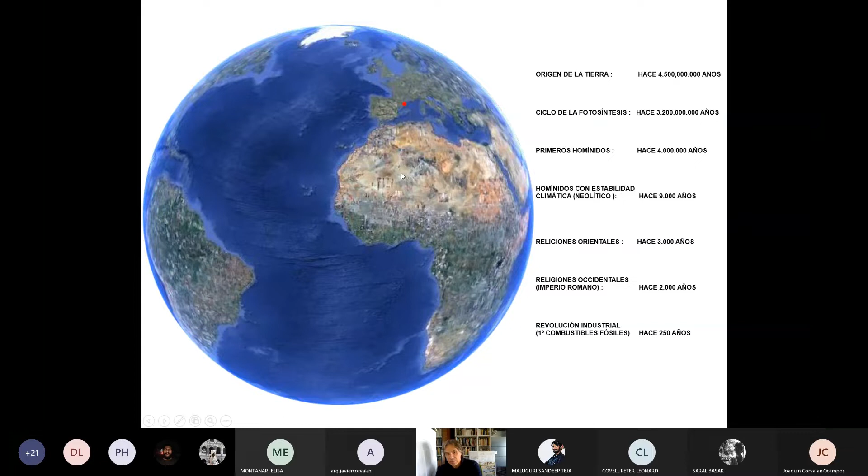Then on this side there is another scale. We zoom in, and you have the coast of the Iberian Peninsula, and in this part here you have the Cap de Creus, which is where I did my doctoral thesis. All this peninsula is 10,000 hectares.

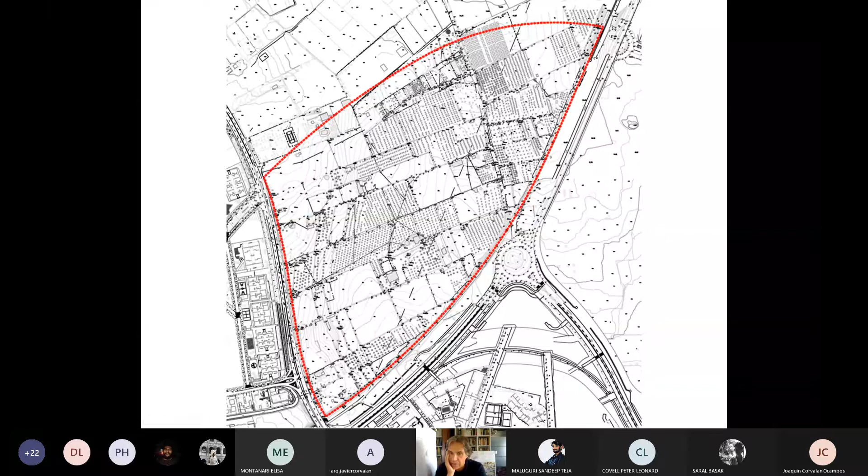The laws of the city are different laws from the laws of the territory. These laws are logical because they understand the water system, understand the resources, understand the necessities, but these grids understand economic interest, understand automatic urbanization with the streets, etc. It's a strong element to live in, I think.

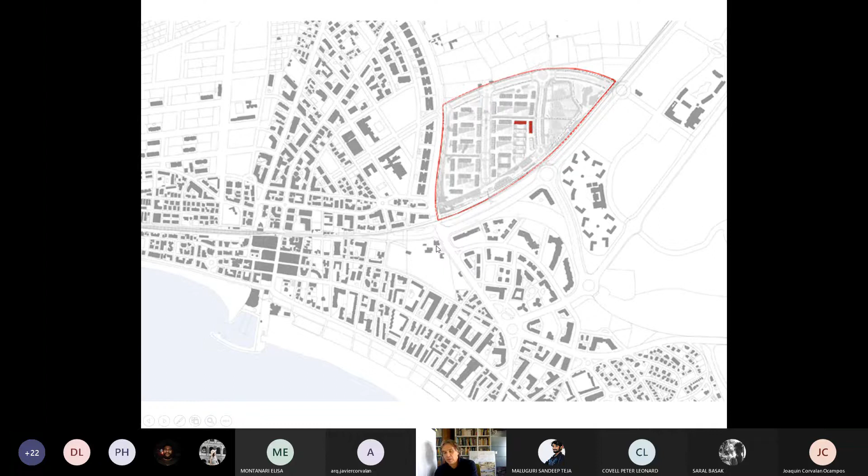But the competition is about this corner, in this system. We like to understand that normally people build this kind of big buildings for summer holidays, etc., with glass verandas, etc. And they make mistakes like this, with this inclination of this element.

Then the sun is all day burning people's legs, and they need this because of that. But if you put it in a vertical position, it doesn't happen. And then I ask, where does this inclined element come from, or maybe this designed bench in the same situation?

But you can never sit here in summer because people put this tree in the north part, which for us is where there's no sun. And then in this combination of tree and bench, you don't have shadow in summer.

It's another big mistake, no? But we prefer to understand the site not in these codes. We prefer to understand this element in another kind of code. We like to understand the habitability from these closed cycles about the water and the resources. And then we see the mountains, the lands, the different elements that appear as elements that interact with the environment.

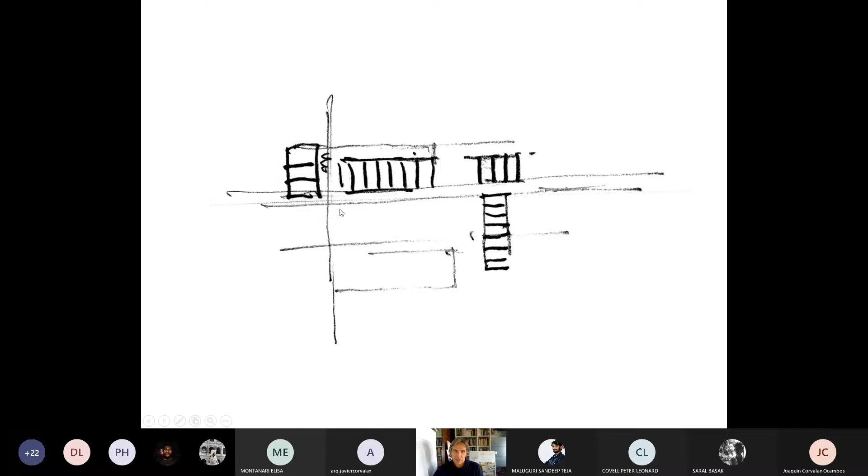And then the two red blocks, we work like this, opening this part, turning the corners and opening this part. In the competition they want the left model, we propose the right model, with these white parts in every plant of the building, that is ground floor plan plus 3 plants.

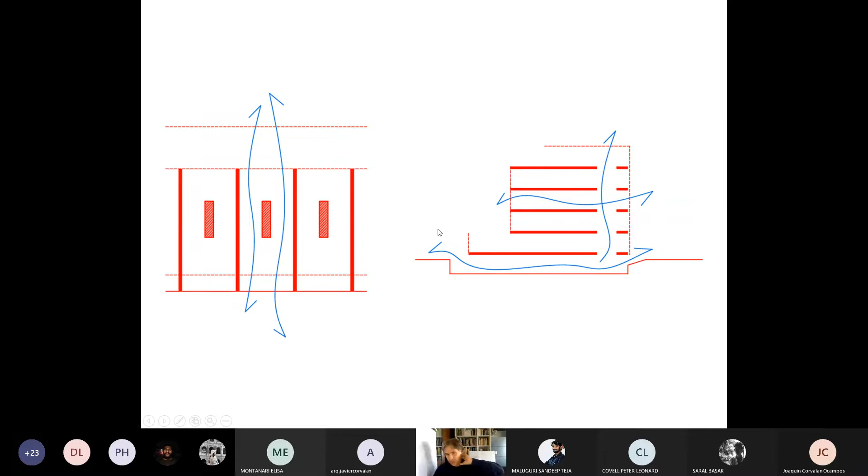Then we propose this technical element in the middle of every apartment, this patio, and this cross ventilation in the parking lot and in the apartments. Then these 10 meters, we propose a little forest of caducifolia leaf trees like this, because the north wind is the principal wind.

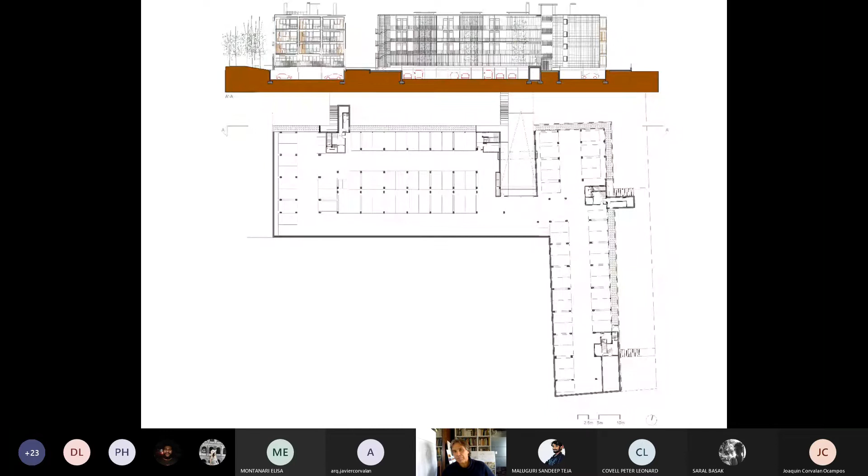And then, as you see in another section, this is the different plants. Here is the facade that you have when you arrive. This is in 2009, when we finished the building, and the trees are younger.

And this is the section. The principal wind from the north refreshes with the trees, a second time refreshed with this curtain of caducifolia leaves, this vegetal facade. And then this pre-refrigerated air goes from this patio that is like a chimney and moves more quickly. After, when you open the doors or windows, this fresh air enters and crosses the apartments.

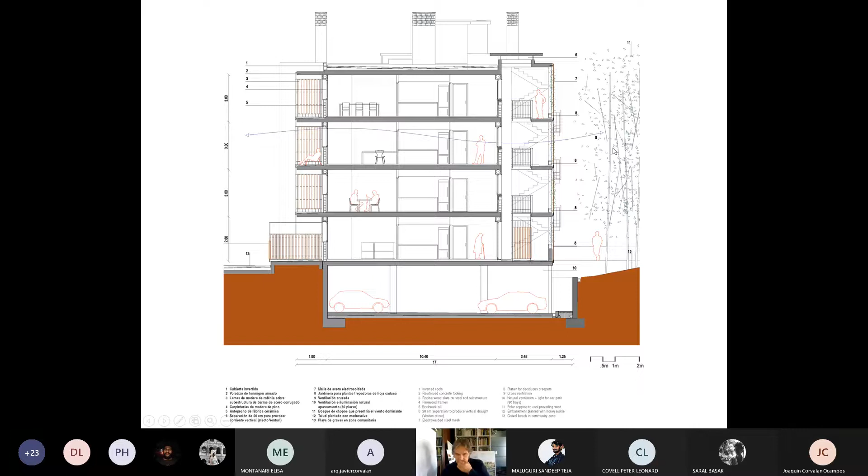On the left is the south part, where you have another kind of shadow. This is the parking lot.

And in the last plan you have the patio with the roof and this little frame, because the air does this natural chimney effect, and when you open the window or the doors, this fresh air enters and crosses all the apartment. This is the little square in front of every 2 apartments.

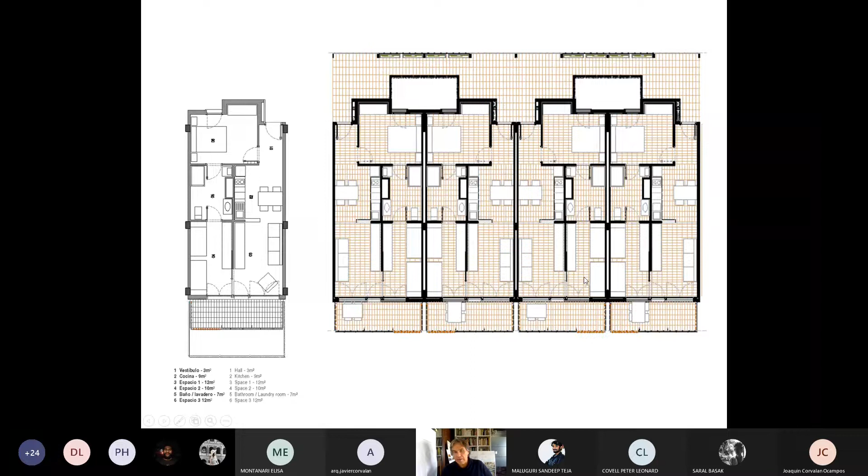This is the plaza in front of every 2 apartments, the patio, that's the privatization with the room, and it's an easy element that 80 groups of people can interpret freely.

This is the south part where you have the 2 elements, shadow or sun. This is the part that we open in the principal steps.

This is when we finish the work, and then the crisis of 2008, 2009 arrives, and they stop building.

And this is one unique hall where we divide into door, window with an element for a table at 90 centimeters, and window with a little bench of 45 centimeters. This cross ventilation, space for the table, and the corridor door in the middle between these 2 polyvalent elements: living room, dining room, second room, the bathroom in the middle, and the kitchen too.

You can turn around all the apartment, and people interpret from their necessities this unique condition of habitability, conditions of habitability.

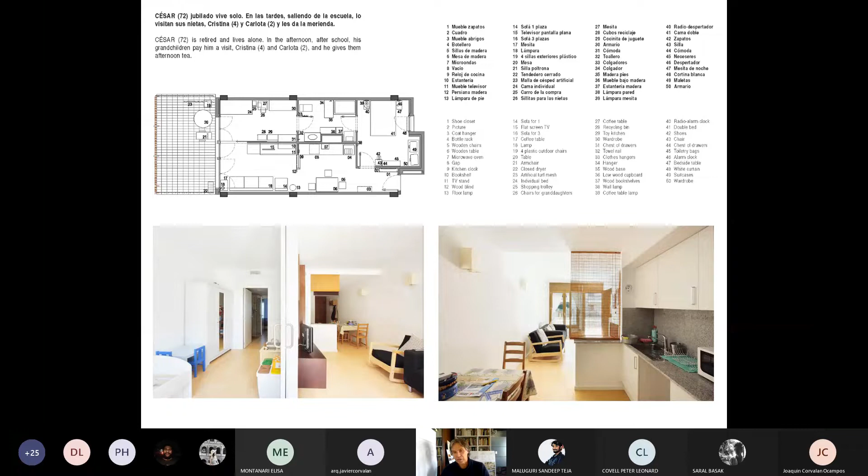We register the people in the first years, what furniture they put, what is the profile of the people that live here, and how they freely interpret these conditions that we offer to inhabit.

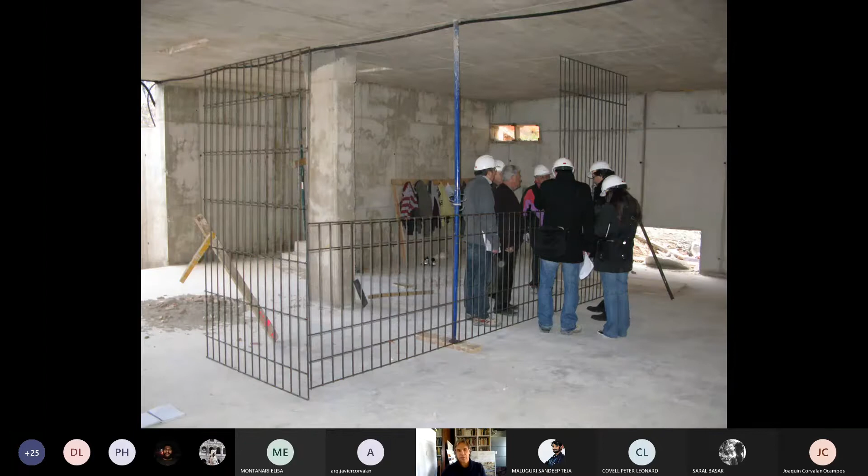The shadow and sun with this element that we prefabricate in the atelier, and then we do a prototype in the parking of the building when it's in the process of construction, and then we insert this grid of elements, and after we put the wood to build the shadow.

And after this pentagram, people interpret it as their necessities. You see the parabolic antenna, the bicycle, and after you see the transformation of the site. Or maybe the dog and the little house in the shadow. This March month, I think, is the same time as now, taking the sun in the morning, etc.

More private people using the last rear bar to add this privatization element. Time passes with different elements, and visits from different universities bring different neighbors who like to show their houses, how they live, and they send WhatsApp messages after. This is one year versus twelve years after people arrive for the first time. You can see these new elements added to the same rear bar for protecting or privatizing the terrace.

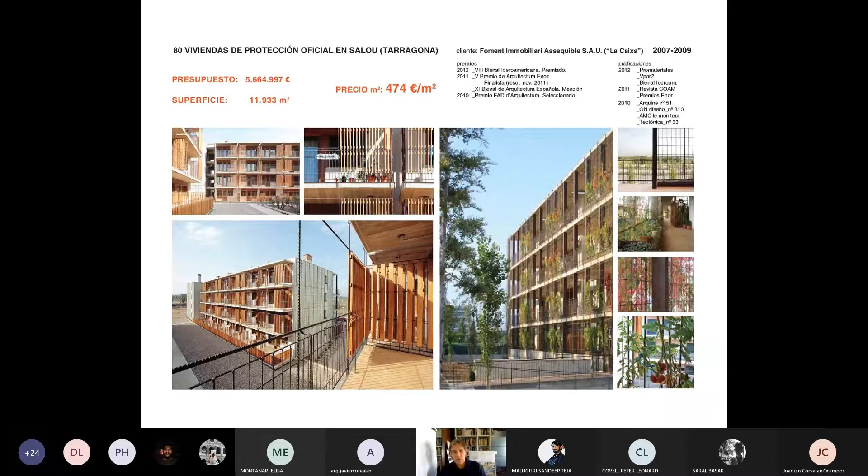This is low budget because it's a logical interpretation, and the materials are not expensive materials, and we try to optimize the resources. Then from this grid we go to another grid, from the Tarragona lands to Barcelona lands.

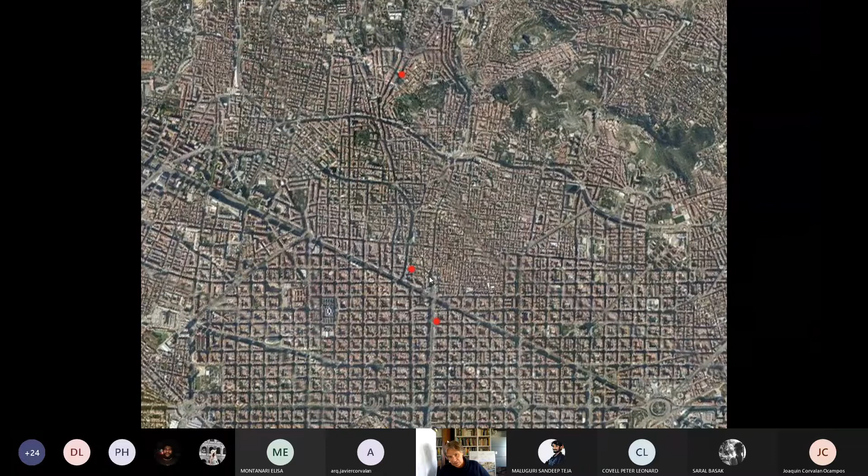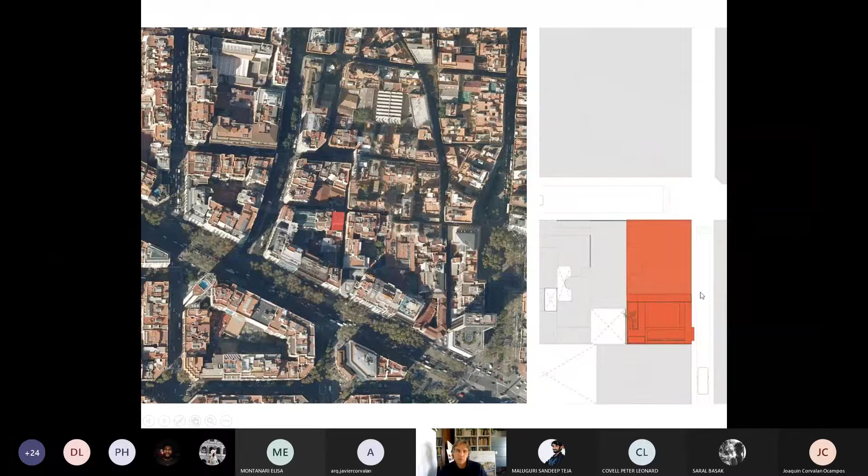This is the point - this is the big grid of Cerdà, this is the micro scale of Gracia, and in this corner, we need to interpret a pre-existing building where they have the ground floor plan as parking, garden, terrace, and after in the corner you have this specific element where the facade does this movement.

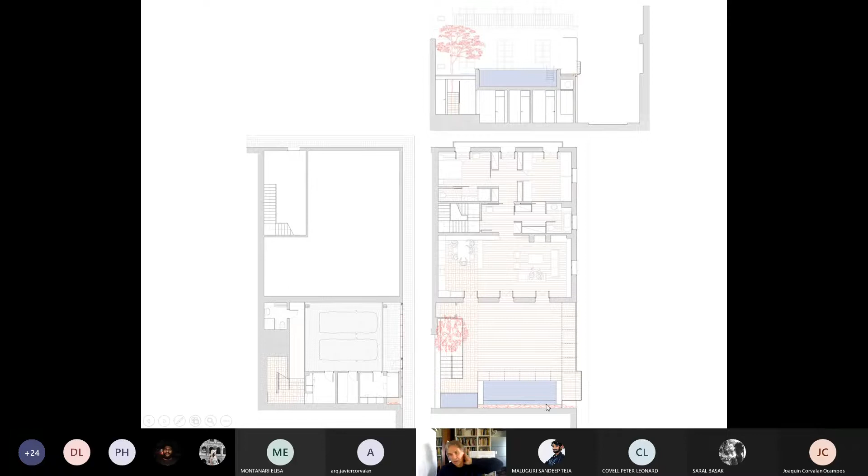We do the rehabilitation of the interior building, and then we propose this entry from this garage, garden, and swimming pool in this party wall. This is the infrastructure of iron.

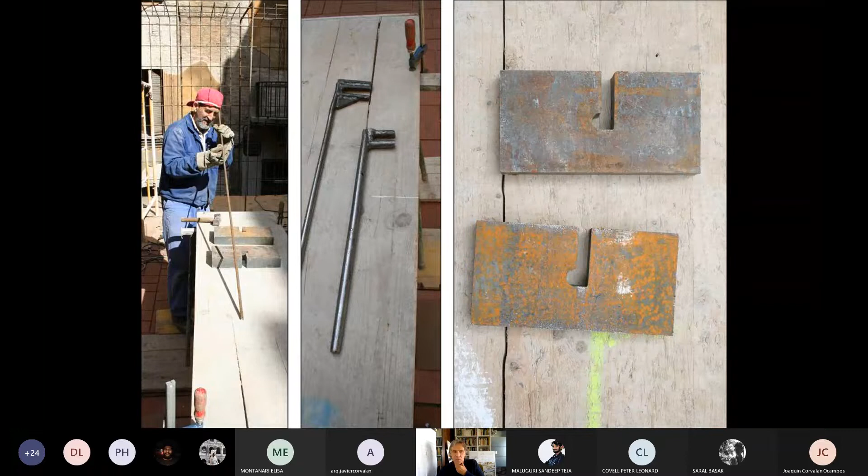These images are from 2006, I think - a little balcony, 45 centimeters, that you enter into the city, the veranda. Then with the different densities of wood, we work with the privatization: more private on the ground floor plan, less private in the last elements, here, near the balcony.

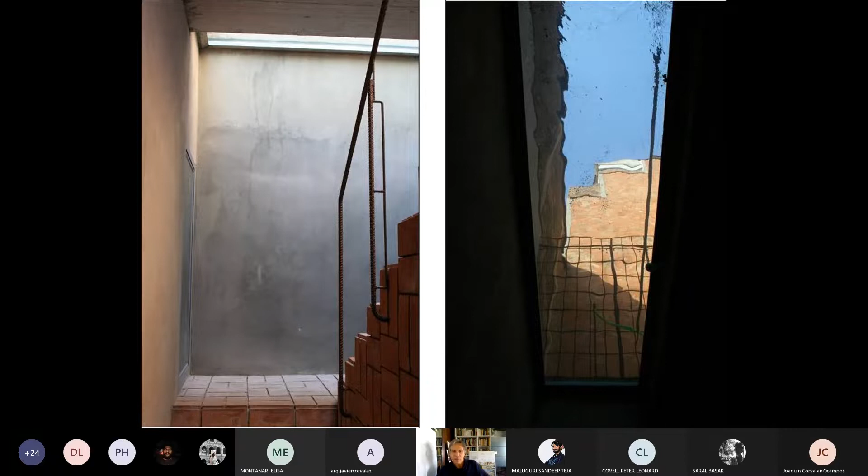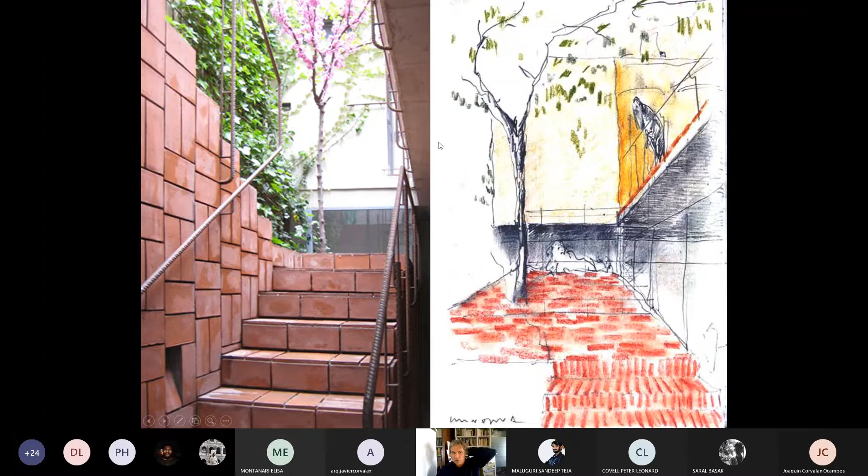See, it's like a garden with terracotta, with graves, the steps, the zenithal light crossing this little water, this little point of water that you have at the top, the lights into the wall. You turn and you discover this tree of love, árbol del amor, árbol de Judea. And right at this point is where the little water is, near the swimming pool.

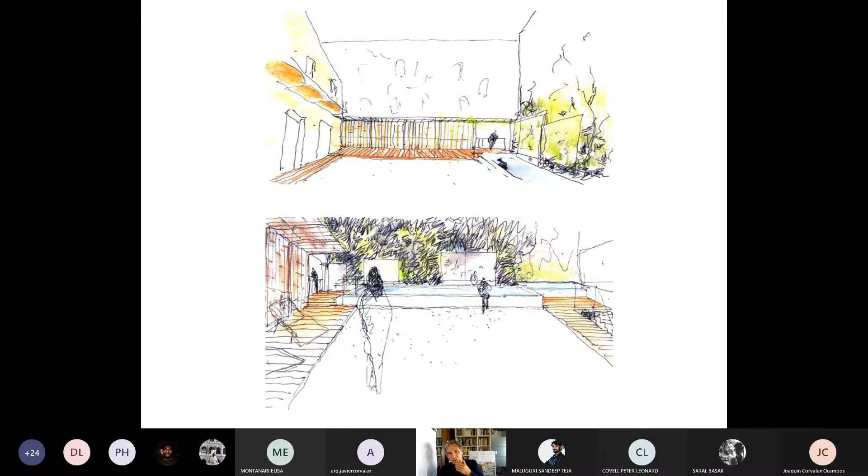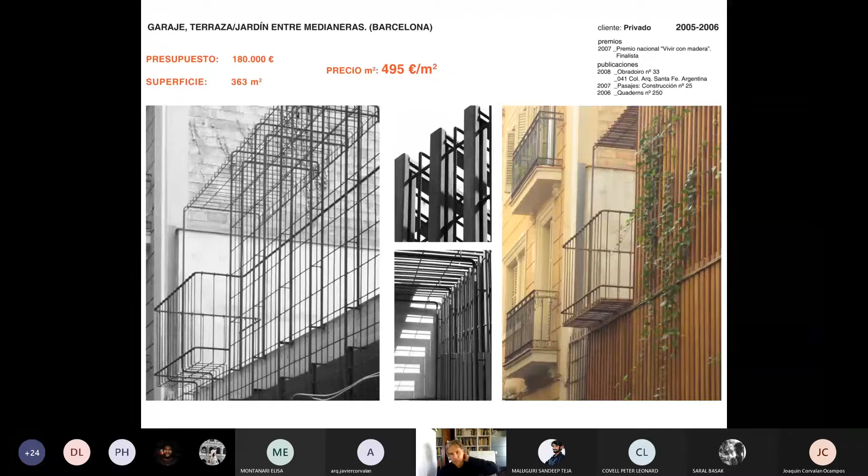Working as a nature space into the city in the limit between two urbanistic grids, using the balcony as the point of contact between these parts. It's 2005, 2006, and from this grid we go to another city.

Here is the city where I was born, Badalona. It's another kind of grid, more industrial city. This is the Badalona Basketball Pavilion, an Olympic stadium from 1992, a Mies van der Rohe Award building by Esteban Bonell.

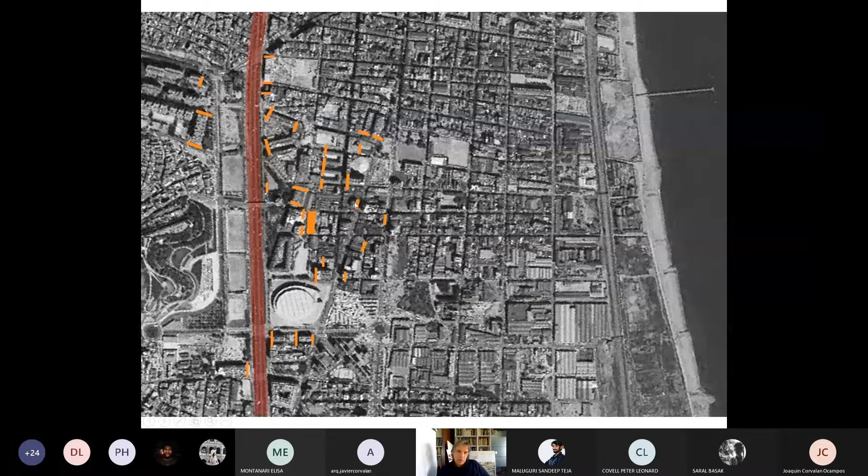The plot where we work is this ancient building, and the other orange marks are the party walls, characteristic party walls of this part of the city. This is the ancient industry at this point. This is the situation in 1940 with agricultural lands outside the city, but actually you have this situation.

And here from 1999 to 2003, 22 years ago, I began to design 35 housing elements as a community. This is the party walls that you have near the place.

This is the normal situation at the limit between the house and the exterior spaces that people here in Badalona use. You have different kinds of verandas at the limit, but they always like to interact with the vegetation. This is the ancient industry where we work.

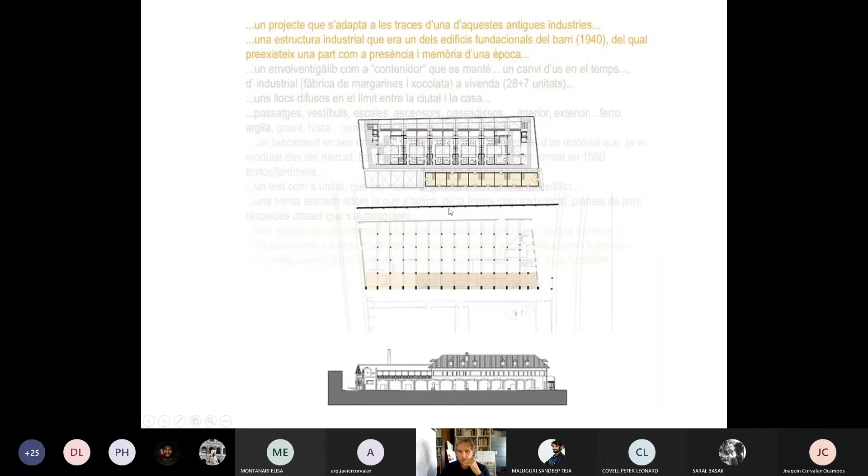We maintain this body, this big element, but we develop the warehouse and put in a new building. And in this new building, we work with this industrial element that normally you use to build the structural element, to create the different holes in a facade, with steel and concrete in the interior.

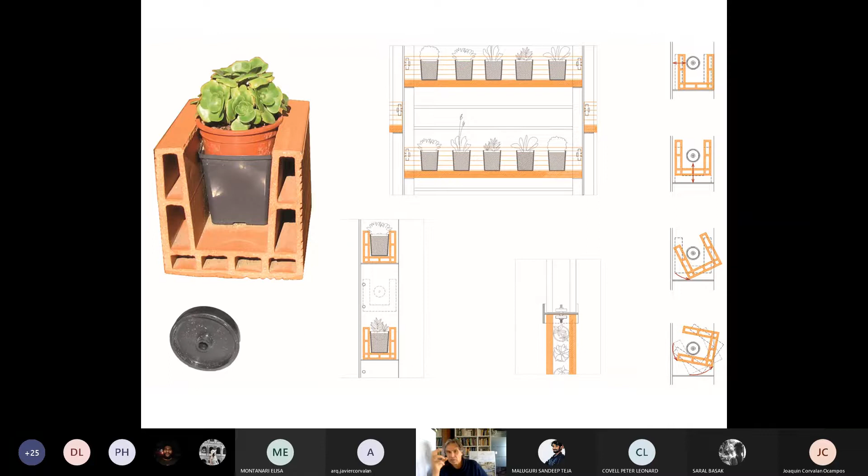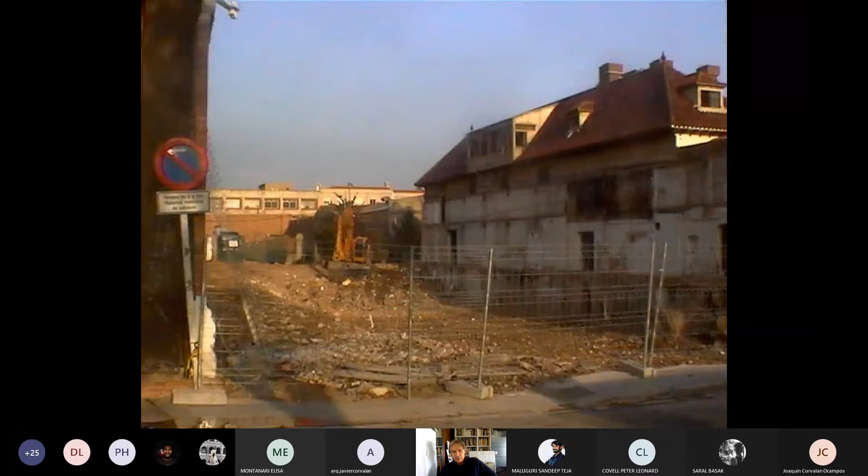This is when we develop the building, we maintain the other one, and after these elements arrive that we begin to work in different positions.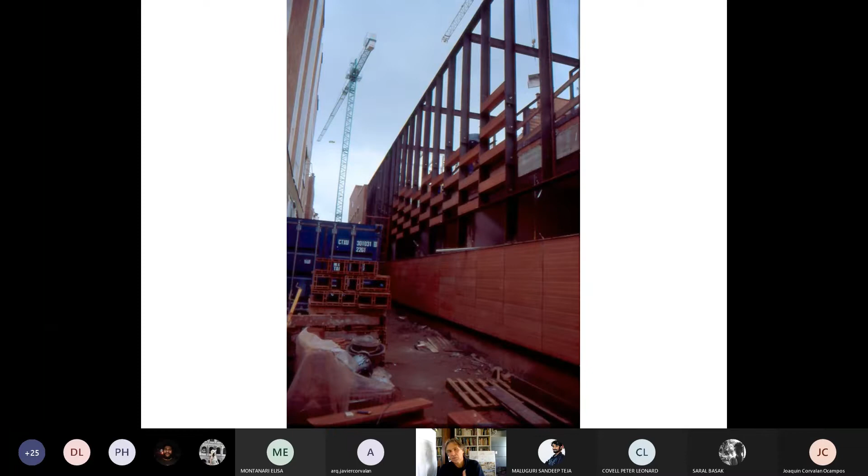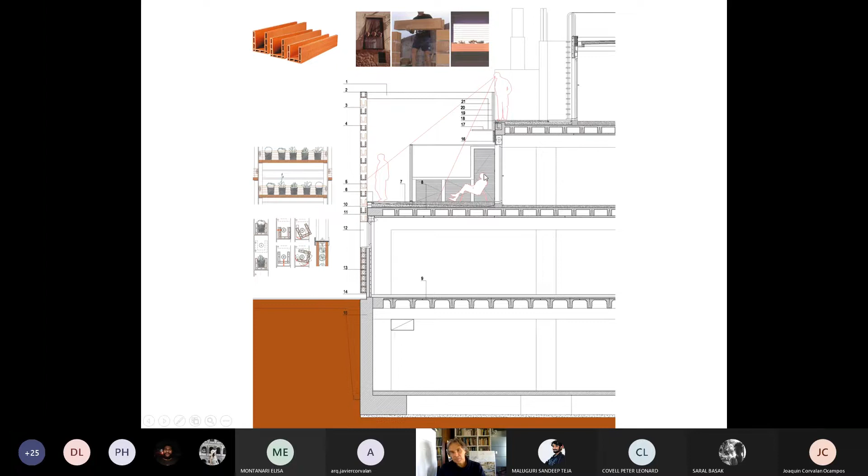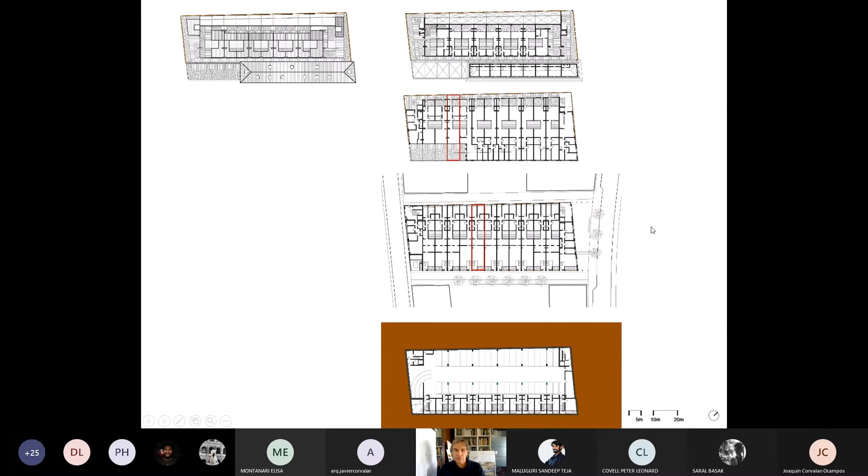The tangential vision that you have one scale, and then when you turn appears the real scale of the holes, how they interact with the party walls in these pedestrian places, the city pedestrian street, into the community, and the intermediate space between the neighbors, private elements and private visions and public visions. We try to combine the section with the different patios, the cross and the longitudinal section, and the 35 plots and the parking lot in the subterranean plant. And this element, different scales from the interior to the exterior.

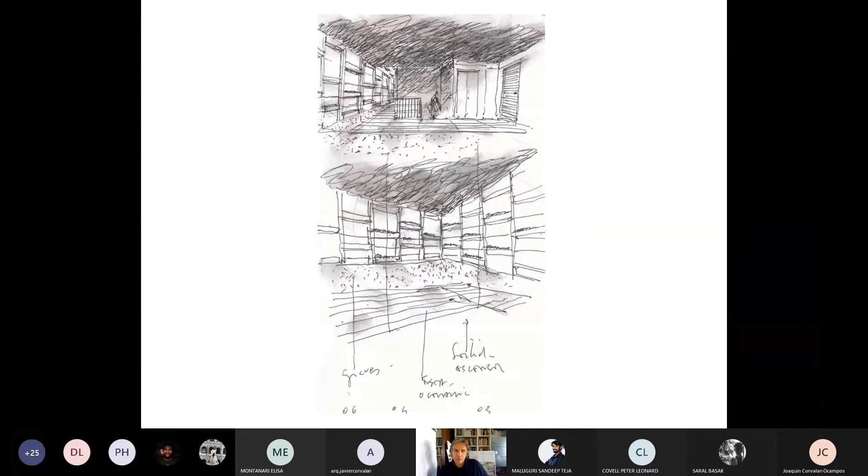Here you have the Olympic Pavilion. And with time, new elements appear. Here you have the skyline with the city and how everyone lives these different urban horizons. The interior spaces—this is in the beginning, but with the years, the people begin to work, the relation with the neighbors, little beaches with water that we have on top. And the life appears day by day.

And then, this is from 1999 to 2003, and actually there are maybe photos from 2 years ago, I think. And I think at the end, the pass of time builds habitability, when normally from architecture we fight with the time. I think that we need to flow with the time.

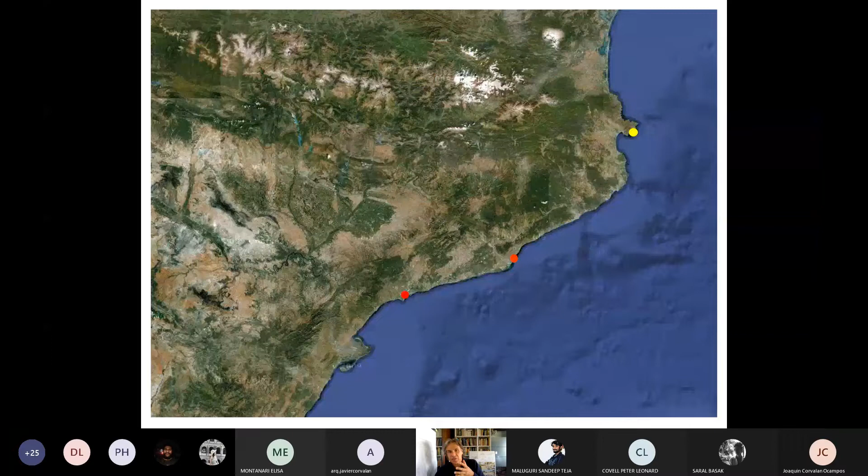And from this grid, from this part, we go to Cap de Creus, where I say, no, this peninsula is another kind of grid. From 1998 this is a natural park, 10,000 hectares, and this is the real object of my doctoral thesis—this 10,000 hectares with this village in yellow that is Cadaqués village.

And in this corner of Cap de Creus, that is this oriental corner from the Iberian Peninsula, we go to this point, and in the tail, in this point, the hole is here. This fantastic site—here you recognize maybe this refuge, this shelter of fishermen that I showed in the beginning. This is the condition of this strong site.

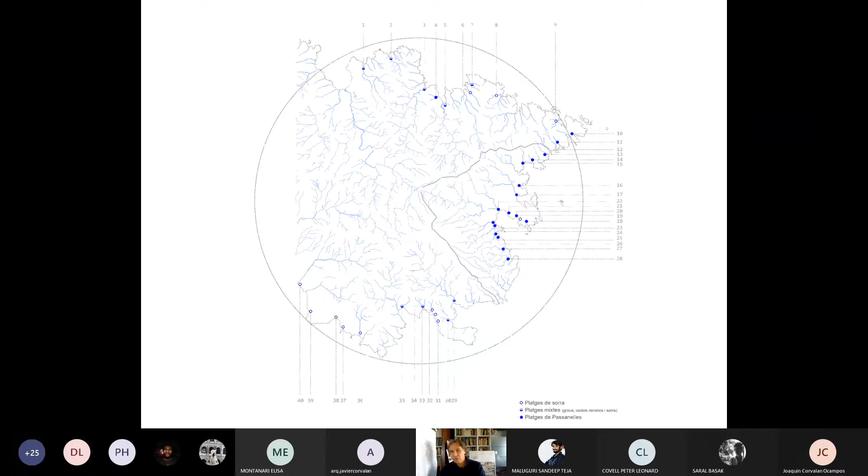This plane has the structure of the water, has the different beaches that appear from the sedimentation of this water. This is the maps of 17th century from the French people, understanding this big mountain as a limit between this little village and the Rosas Gulf.

This is from the 80s, where you see the agricultural grids that they understand in this map. This is from the 19th century. These are the agricultural constructions to have the animals, etc.

They recognize the prairie, they recognize the line of the water. They put in the prairie the wet, and then this wet in this horizontal plane, circular plane, that they built with the same stones, taking stones from this part and adding in the other part and building this circle.

With these big stones, is this element on top. It's a fantastic place. They understand the conditions, how to inhabit with the prairies, with the water, etc. Always the same condition in different kinds of 'massus' - the specific name of these agricultural constructions in Cap de Creus. Always they have a prairie, always they have one little line of water.

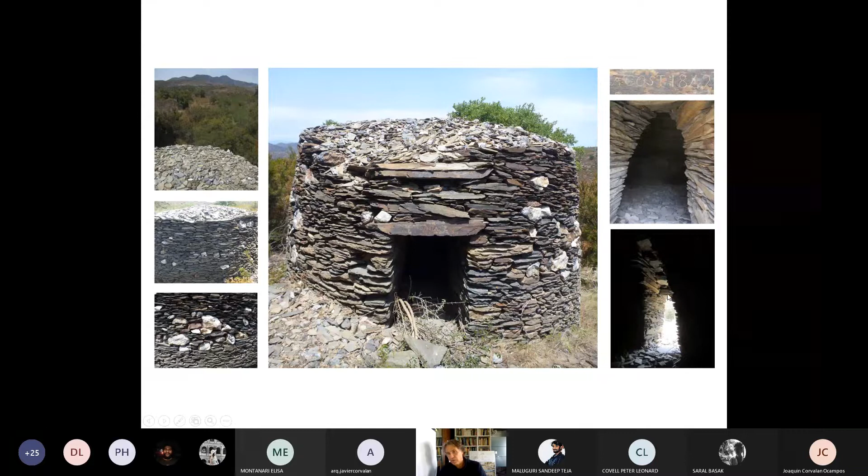This is, you see, the date August 1842. It's built in a dry system with here 1, 2, 3, 4 lintels, and you have one wall of 1.5 meters of length. For this one that you see facing the southeast part - sorry, that is where the sun rises in winter.

This little refuge, in the entry, for 2 people that take the breakfast with the first sun in winter, and 2 bodies in contact to be warm, and then they take in organic energy with the breakfast and after they use this organic energy to go to work, to build walls and horizontal planes to grow the vineyards. This is the plan.

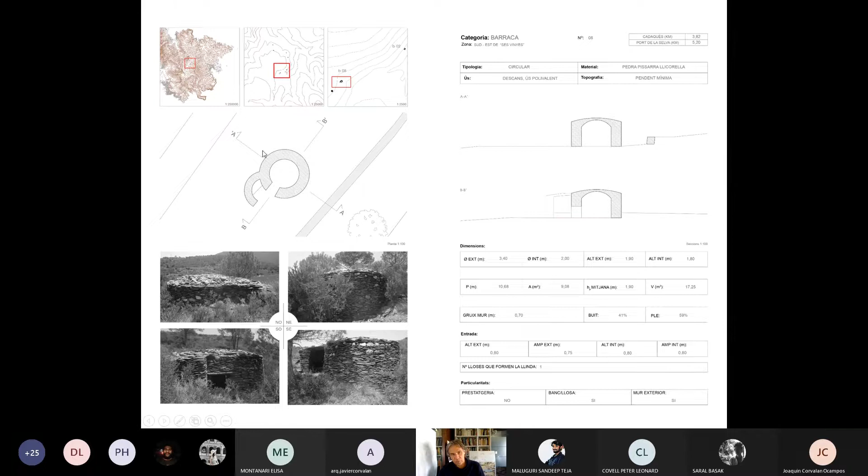After, we see something more modern with this interpretation of the wind to protect against it. These are different shelters, always the same conditions, where it's a polygon at 45 degrees from the north wind to break the wind, and when it's circular it's a structural element in a circle that is fantastic, and the openings are always from southeast to southwest - following all the movement of the sun during the day.

This is another construction, not shelters, but the excess material—the material they don't need. You see there's more material in each case, no? These elements are locally called clopers. A cloper is the material you don't use after using the land as a quarry. You take the stones from the earth, and after using it, the stones you don't use—it's not necessary to have them in the middle of the lands because it's a wrong element for you. They accumulate where it's not possible to grow the land. That's where the rocks emerge. They use these rocks as a foundation, and then accumulate these monolithic elements as a tumulus.

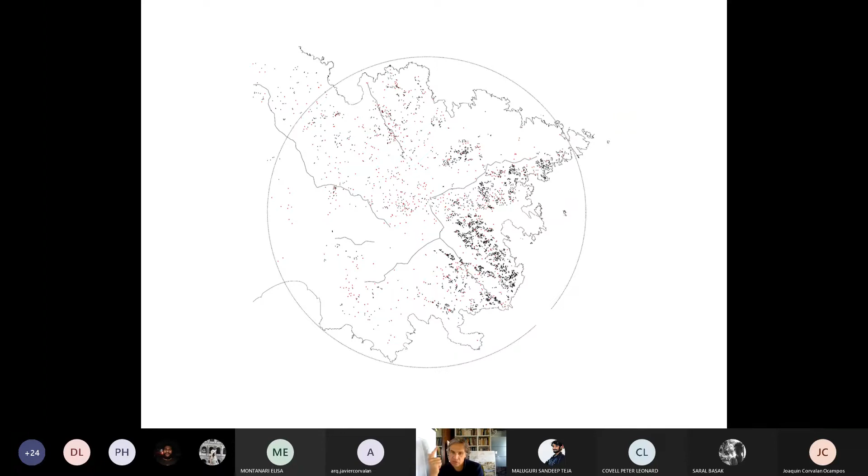And the combination of these two kinds of buildings across these 10,000 hectares is all these elements. Now you have streets, now you have buildings, and then you have the masus or macias, the big constructions. Here you have the dolmens from the Neolithic that are nearby. Here you have the medieval constructions in the prairies that we showed. Here the shelters, here the clopers or shelters, barracas and clopers. None of this existed before this thesis, because people knew they were here, but now I have the different elements recognized and understood as a system.

At the end of the 19th century appears the phylloxera, and then the vineyards died, no? And then people put in olive trees, from '89 I think, at the end of the 19th century. Orchards—and this is from 1929. The limit, you see how the agricultural system arrives to the sea, and the different boats are prepared to go fish. And this is before it became a touristic village.

This is the perfect harmony between interior and exterior, between the earth and the water. In 1956, there's a big frozen climate, and the olive trees die, but then the first tourism appears in the 50s and changes the model from this agricultural and fisherman people to the tourist resource.

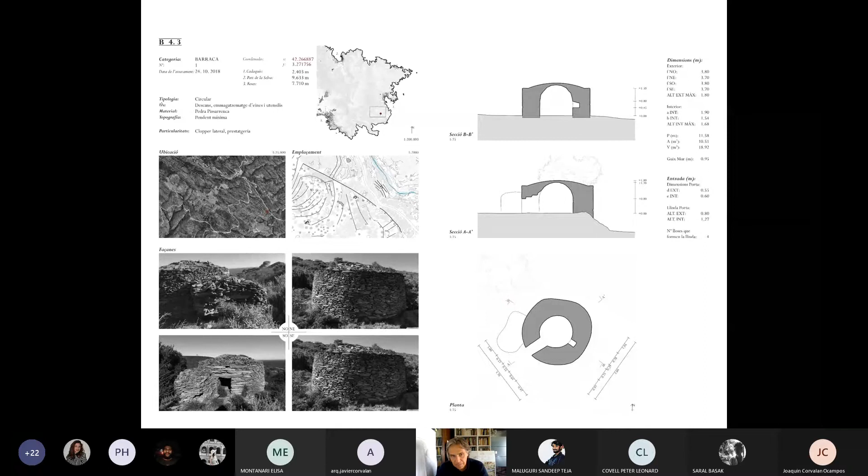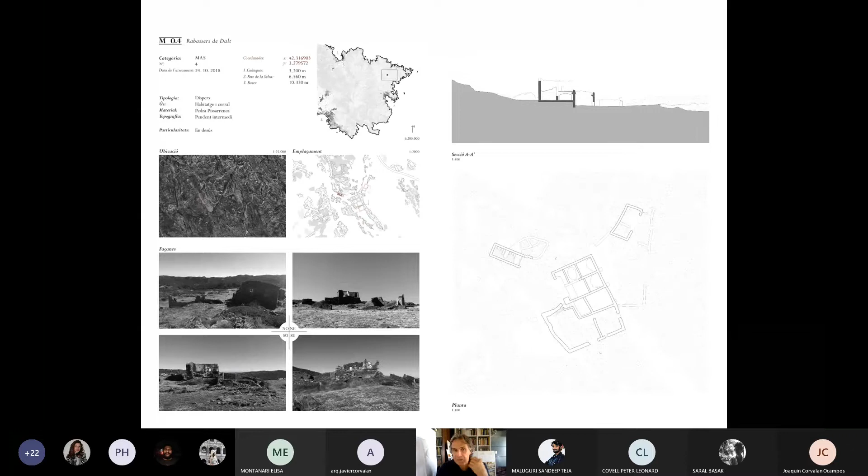Now I have registered an important 100% of these elements with every specific detail of every one of these elements that now exist with the same system, everyone, or the Macias I entered and developed with people of the studio in this professional work. And I show how we work with the satellite, no?

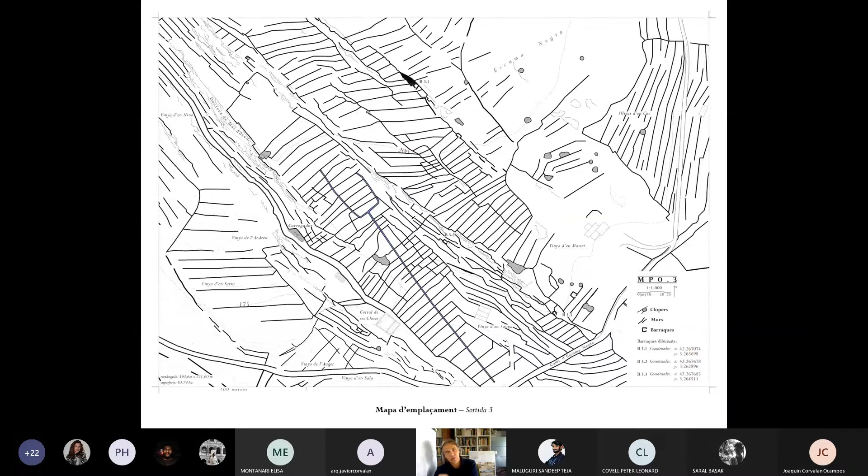From the photo satellite, and after it arrives to the drawing. And then this A3 page in 1/4000 scale, you can have these drawings where you recognize the little barracas or the clopers or the structures for the water. And this is different portions of this general plan, but not from the urban part, from the agricola part. And you have all the barrios developed with this kind of drawings of this construction. And this is one part in the urban situation, no?

And this is a real conflict, because in this previous land, with this structure and these resources, appears the business inversion from the tourism with 104 houses and one hotel of 3,000 square meters.

Here you have this structure, this topography in time. Here you have these 2,300 olive trees and 66 units of oak trees, but appears all this element that grows from here, and this is the new plan with this implementation.

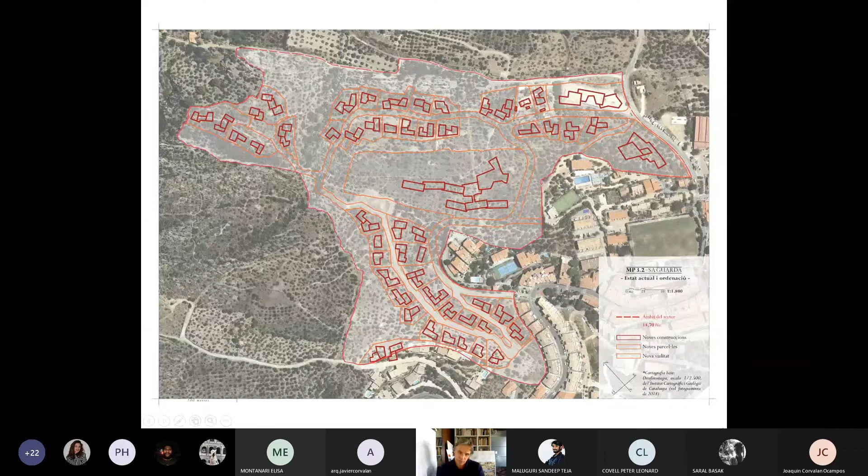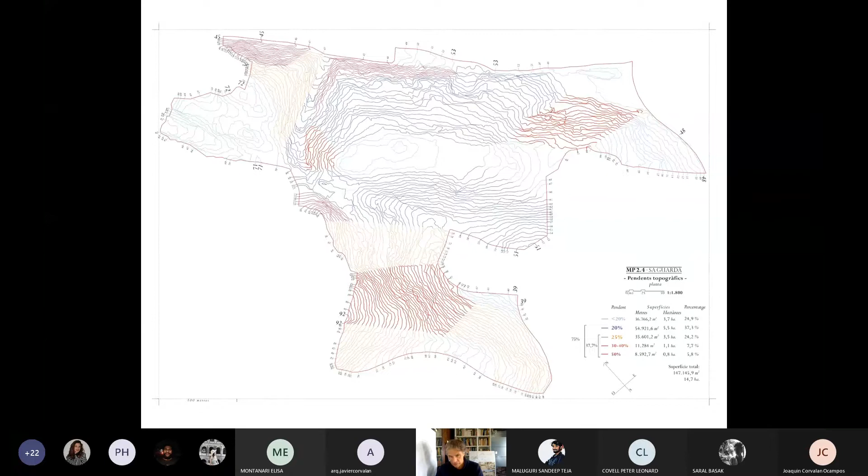You know? But there's one law that in sites that have more than 20 or 25% inclination, it's not possible to do the urbanization. And we reviewed this, and we showed that it's only possible to do 60 houses, not 100.

You know? And we demonstrate that it's better to do 60 houses and not 100, in a model like this, not in the urbanistic plan that they approved with this volumetric element with ceramic tiles on the inclined plane. We propose to integrate with the shadows, with central patios, ventilation, thermal inertia, and to live among the olive or the vineyard trees.

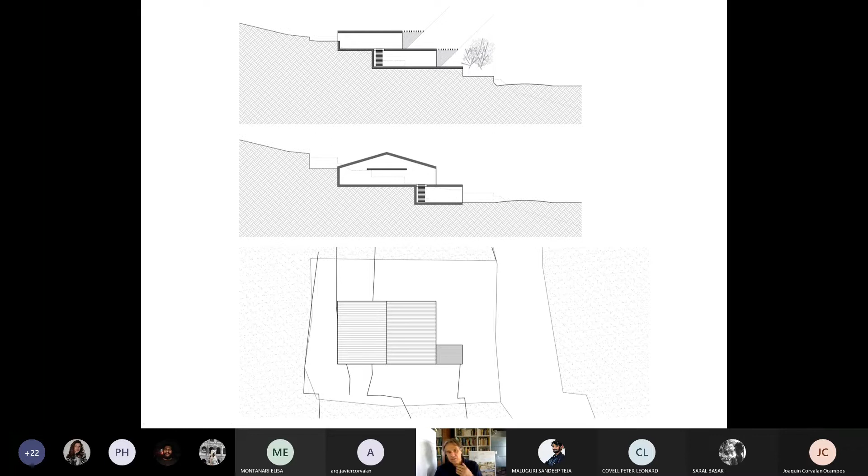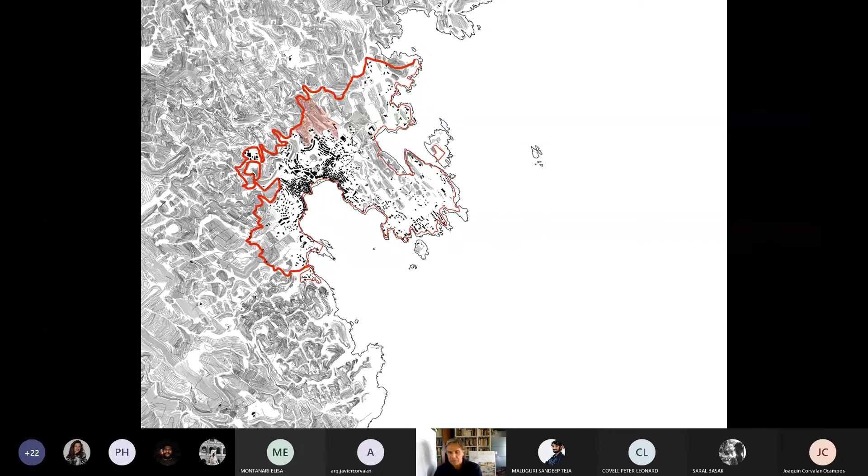And with less density. This is the line, this is the big element that they propose, this new urbanization here, and then the water, the depuration, a lot of people, etc., etc., is a reflection about this pink mark, no, and how this limit between the two parts we need to interpret as another direction, no.

If we were in the 60s of last century and we had this situation, and if in the 60s we had the conscience that we have now with the territory and the relation between the parts, not the absolutism of the urbanistic planifications, no? I think that we could have another kind of Cadaqués, 40, 50, 60 years ago, no?

This is the ancient road that goes from Cadaqués to Port de la Selva. Here you know all the structure that I show with the doctoral thesis and the agricultural system plan for the town hall, no? This is the mark of these 100 houses, no?

More higher than the church, no? As another village there, no? And I think that they don't have limit in this sense. It's not conscious when they draw this urbanization, the possibility, no? Because this is the structure that you have in this territory.

And if you read this structure as an architect, as a planner, or as agricultural people, or day-by-day people, how to inhabit the territory is better for human people, no? To understand the logic of the four natural elements, to close cycle materials, and to understand the resources of the biosphere, no?

And to finish, I show you two little exercises of two houses. One new house that I did here from 2009 to 2012, and another house that is this white element from 1957 that I finished now after 4 years, doing a reinterpretation, a new property, and it's a historical house that after I explain to you.

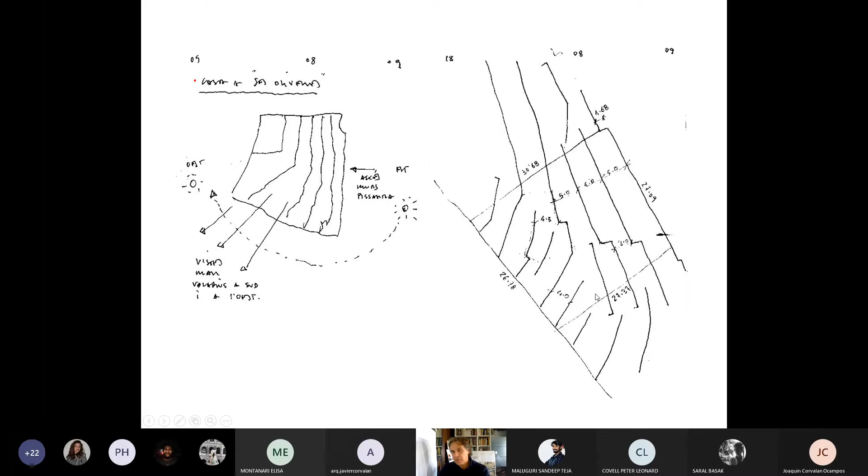This is the previous structure that I recognize, built by people from the olive trees or the vineyards. The dominant wind, the movement of the sun, the distance between the different terraces - 5 meters, 4.5 - sizes that are good for one house. After we take away all the superficial vegetation to recognize this construction, this diagonal that you can follow from the lowest point at the base of the land to the top, 10 meters more.

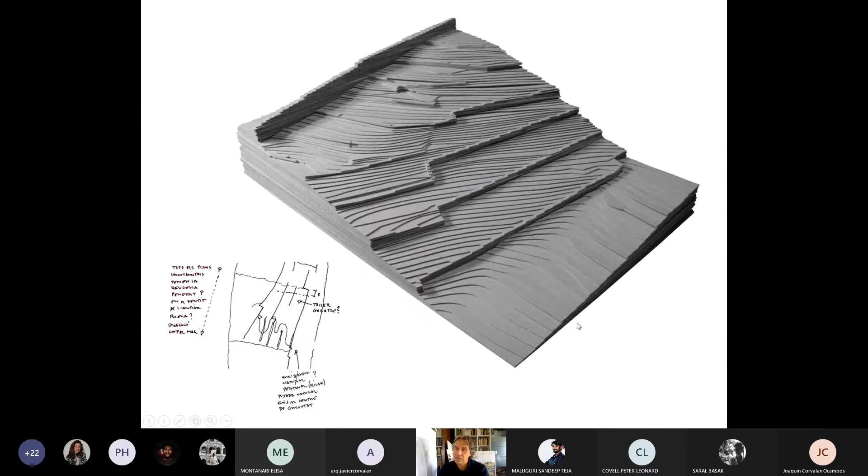We recognize all these elements, and we built the first model - this agricultural structure. And after, we try to understand how to inhabit this site with one house, how to inhabit this olive trees land. Here you have this diagonal, recognize it.

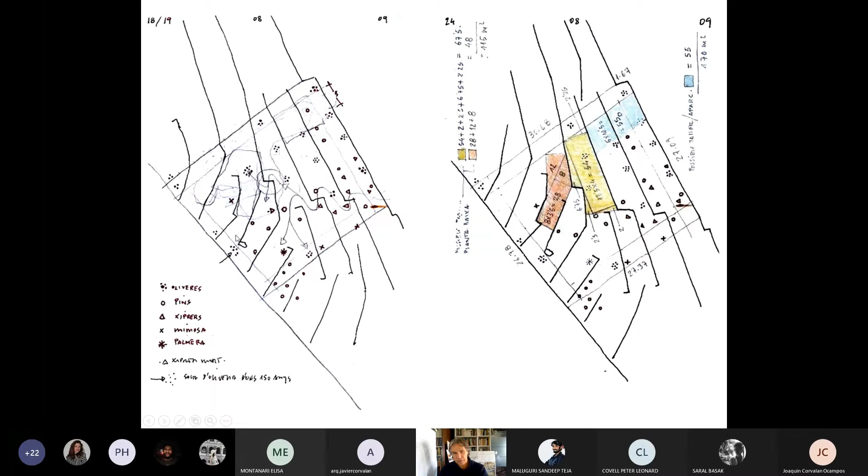You have the previous trees that we have here. Here is a big hole at the top, where we situate the first schemes of the house.

In section, we put the house nearer to the earth, so we have more thermal inertia, because we want the view of the sea between the floor and the branches of the trees - not through the leaves of the trees - because the tree is always growing bigger. If you put it between the floor and the branches, time works in the right direction, and you are at scale with the olive trees, etc.

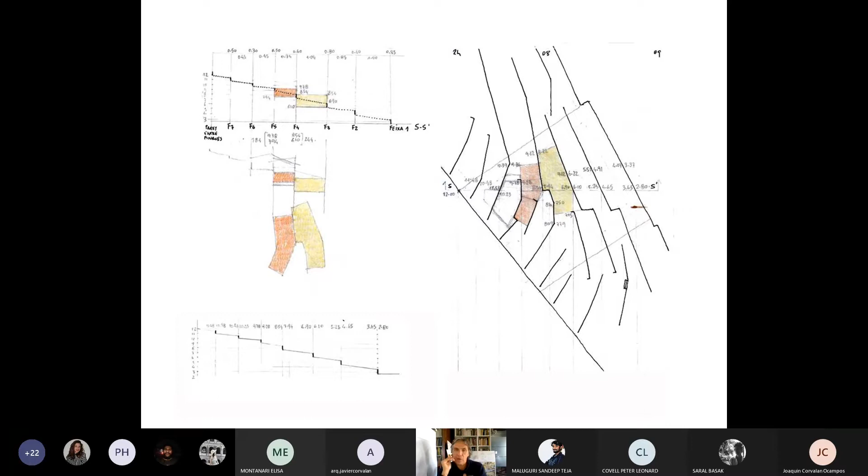And this is the second model. We have consciousness of the first construction, and in the second one, the principal lines of the structure follow the same direction as the principal lines of the topography of the land.

Then you can do this excavation with the rock - the north wind enters from these holes, and the southwest wind, the Garbi wind, the other dominant wind, enters from this direction. And the house always faces the direction of the ancient olive trees.

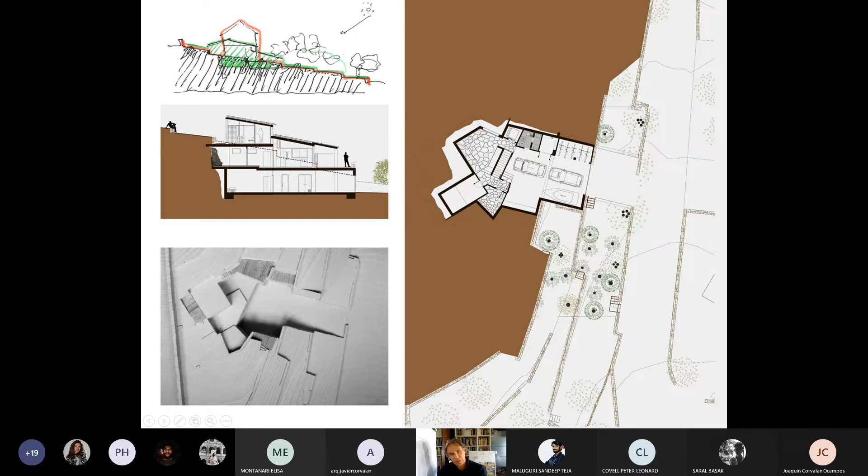On the second floor are the rooms, and on the ground floor plan, the parking lots, etc. In this section, the green color is what we build more below the earth, and the other is the maximum height we can reach if we want to go in the other direction.

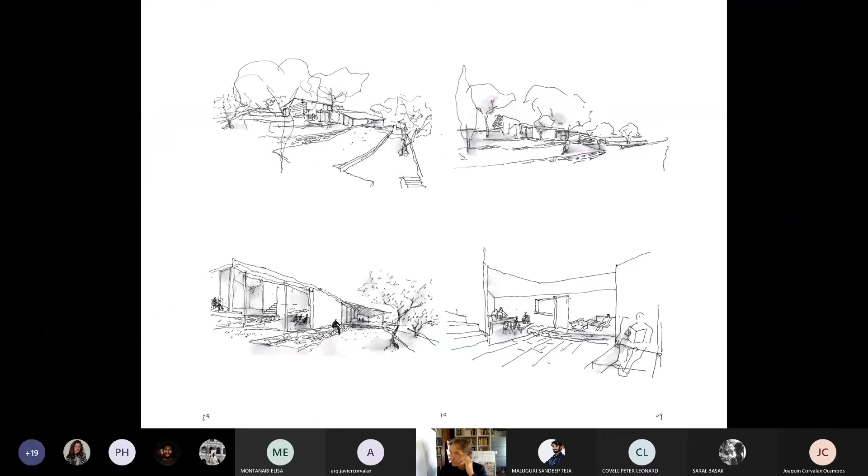Previous drawings from 2009. We take all the stones of the walls, we create the new topography, we enter the new topography, and after, we rebuild the walls in the direction of the house.

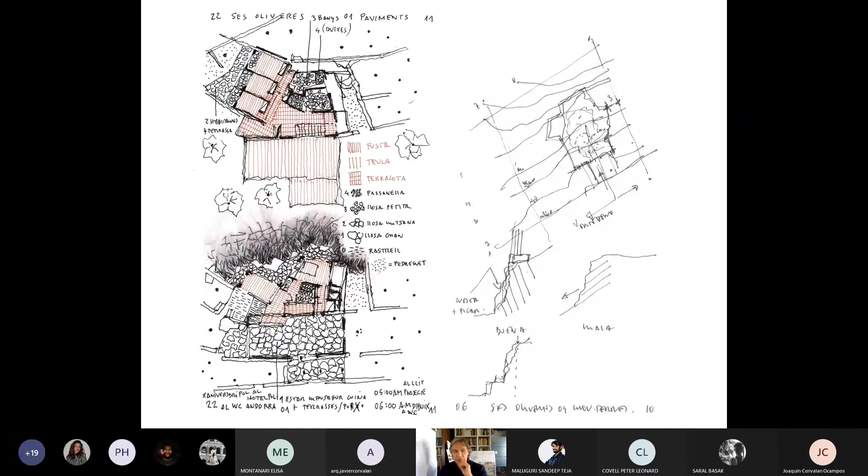Rock entry with thermal inertia in the interior of the rooms, different kinds of pavements. We discovered this rock during the building process, and afterward we incorporated it into the house. The other rock in another room is this one.

At the top, there are the rooms. And we cross the house, and we cross the olive trees land.

The west part we protect from the sunny afternoon in summer with this gallery. And the last wall enters the principal room in this form. We see the horizon of the sea between the floor and the first branches of the olive trees.

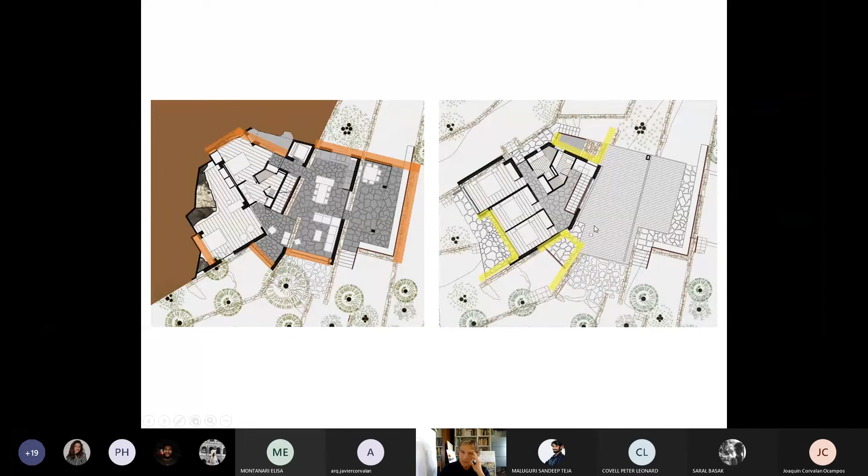And as a geographical element, if the north wind blows, you can find protection in these little beaches here, like in the Cap de Creus peninsula, or in these little bays - it depends on the wind of the day, whether you have a sunny day or not. And there's the analogy of how you navigate with a boat in this big house of 10,000 hectares.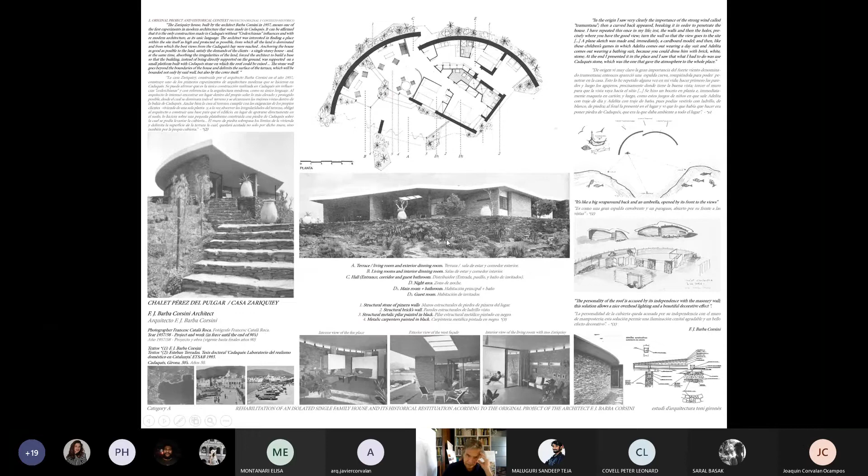1957, as a sacred temple, in the top of the mountain, only the sky. There's a pavilion, a modern pavilion with platform, etc. They do these drawings, principal winds.

After you see the analogy, that protects, and from this point you can see the horizon or the village of Cadaqués.

This is during the last 20 years. Another property changed things of the house, put these elements of the glasses in white color, changed this pavement, put this element, etc. We did the reform.

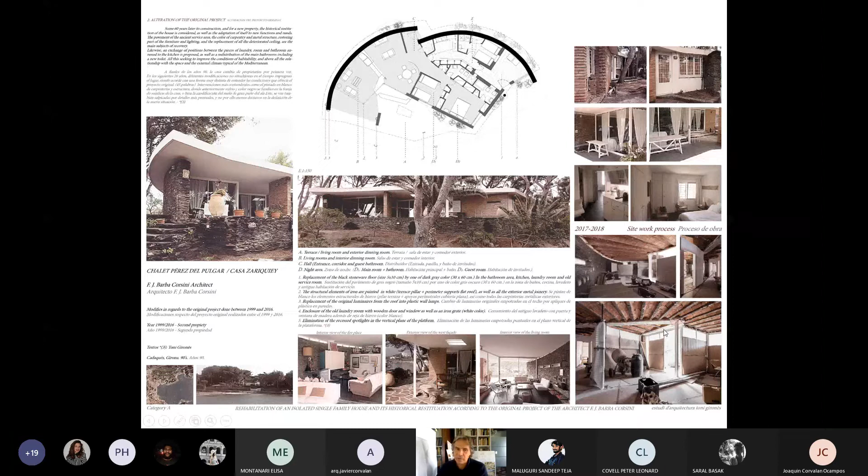1957, 2017 to 18. From this position we pass to this, we change, etc. This is one of the elements that we did, but the condition from 57 to 17 is that the scale of the site changed.

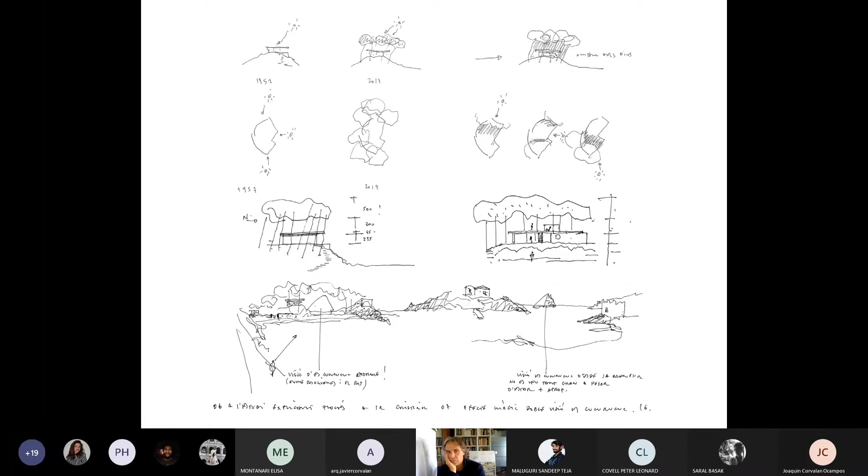Now we have the real plot of the site, not only the house. This is 2,500 square meters with the ancient parking element that now we built a house under this roof.

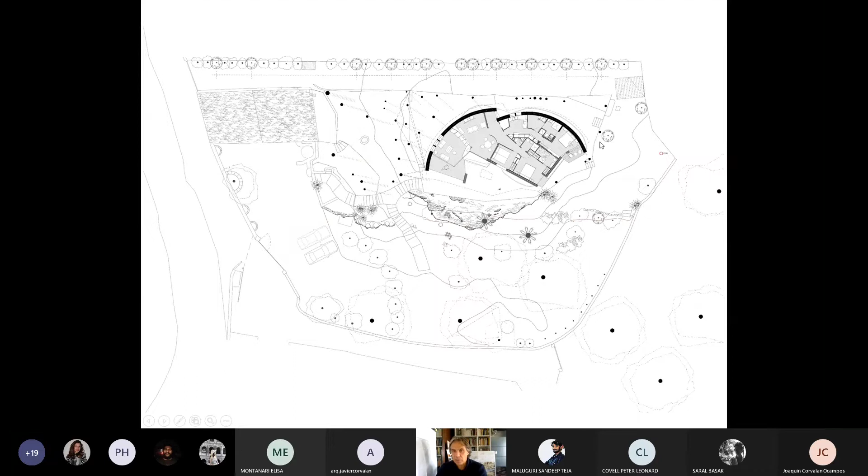We discovered this rock that is under the earth. We put a little point of water, a circular element, a little swimming pool, and we worked the limits. We add here a new storehouse under the terrace, etc., etc.

From these conditions, we pass from here, and this is after we did all the work. And this is 60 years ago. This is 5-6 years ago, and this is 3 years ago.

And after we clean the vegetation, etc. This is the interior reform. This is previous, before this reform, how it looked. This is 57, and this is after our work.

They put this pavement, and we change from the original another time. They have it like this. Here we put a new room and open and build this terrace with the same pavement in the interior. The possibility to open in summer with the view of the horizon as a shelter.

In this way and not in this way. Okay, you can open all this glass. In winter where it's closed, you have all the horizon free. And these three elements you put here, like this, and this one you can put here.

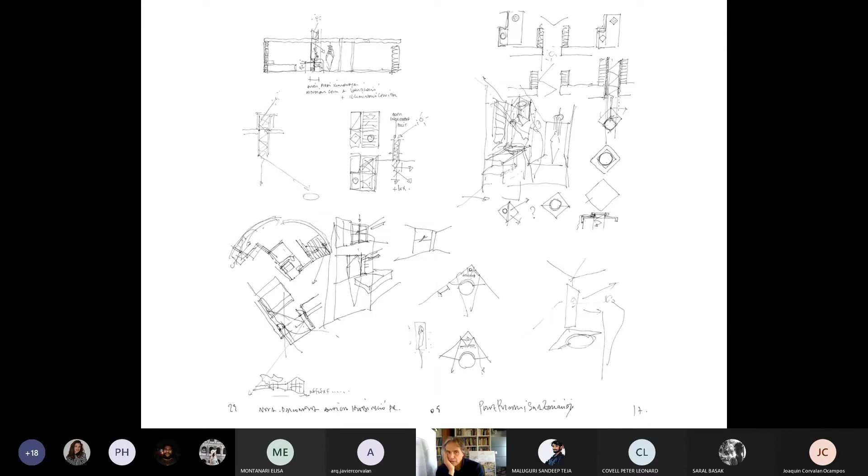This is zenithal light in the new bathroom. This is in the roof. Here there are the deposits from 60 years ago, but now there's another system, and we reuse this structure.

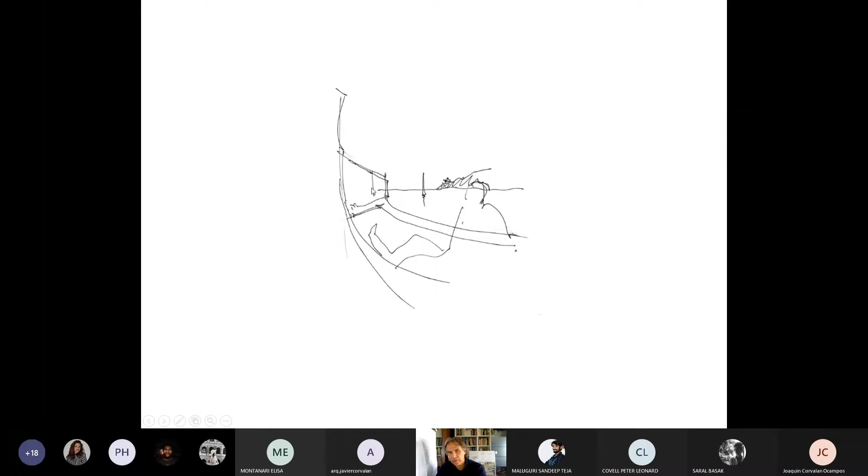To have a protected element from the north wind, and to see the same position of the house, but 3 or 4 meters higher. And here you have the roof of the pines, the new pines, but it didn't exist 60 years ago. We did this space for the afternoons to stay here quietly.

And here is where we put a new swimming pool. We discovered this rock, we took out the earth, we showed a piece of Cap de Creus into your land. Here appears the little swimming pool.

We put a vertical stone like in Mas de la Llobatera, where you see the site for the animals, a circular element, because it's better to build a circular element, and you are closer to the rock geometry and the pine geometry, not the platform. We want to be nature with this natural beach, and we don't want to be platform in this sense.

There are different references with the natural elements, rock, pines, etc.

You have this possibility afterward to come to the sea, to enter with sweet water here, and to sit in a little bench that you have in the interior, but you never see this water from the big platform of the house. It's an intermediate site where you have this little beach, a private beach into your land, with this little piece of water.

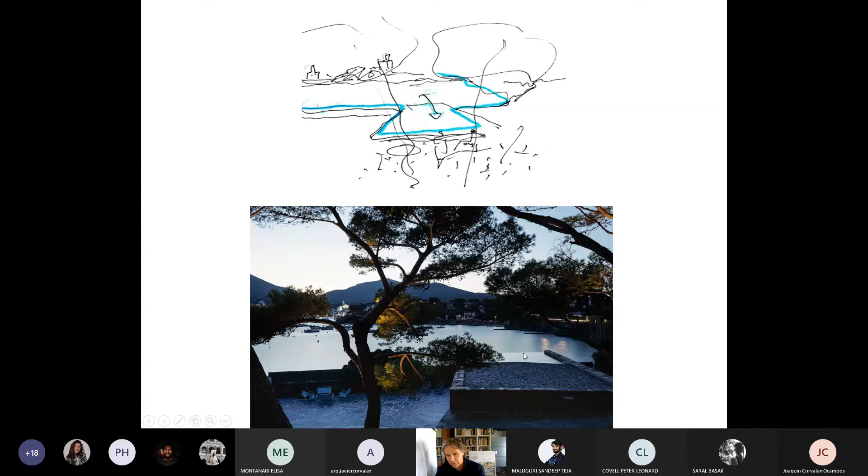And this is the new scale of the site. Within 2 or 3 days, we inaugurate an exhibition about the process of these last 4 or 5 years of this house.

But at the end, we have conditions, and people that work with good habitability interpret these conditions. This non-architect with this shelter, Barba Corsini with this another shelter—at the end, I think there are different datums in different scales.

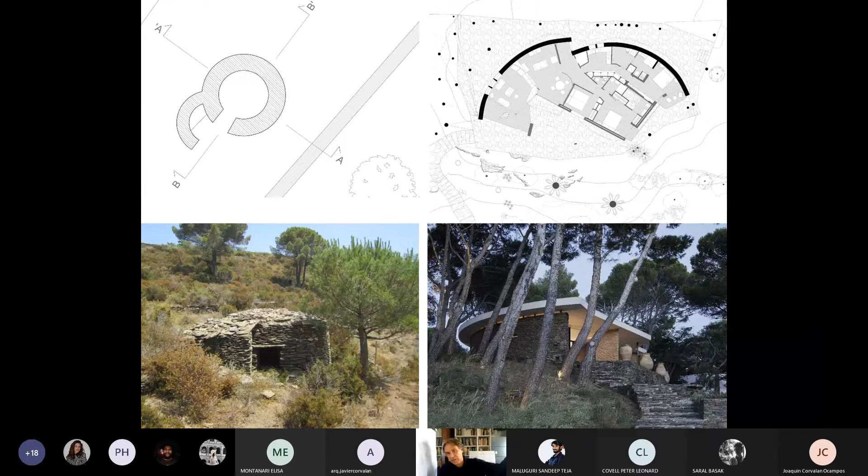1/1 scale of human necessities, but also geographical scale of human necessities, territorial scale of human necessities. We're always working in this zoom in, zoom out, from satellite scale to 1/1 scale of the position, and we can inhabit by understanding the conditions of every territory—flatly, with agricultural systems, more pile-dwelling like these trees.

Or more topographical, with excavation in the rocks at the end of the Pyrenees—this big rock of 10,000 hectares that is a big city, an agricultural and fishing city, with elements like this, from 1/1 scale to satellite scale.

And at the end, the investigation is that different human activities activate different kinds of anthropization. The different grids that you see here—if you don't have the prejudice that architects only work in the city, only do buildings, only do skyscrapers—it's possible to interact again with natural elements, to close cycle materials, and to close cycle conditions of the different elements of the biosphere.

This is the real thesis at the end. The peninsula of Cap de Creus is only the object to explain this thesis, in this geometrical and circular element of 10,000 hectares. Thank you very much.